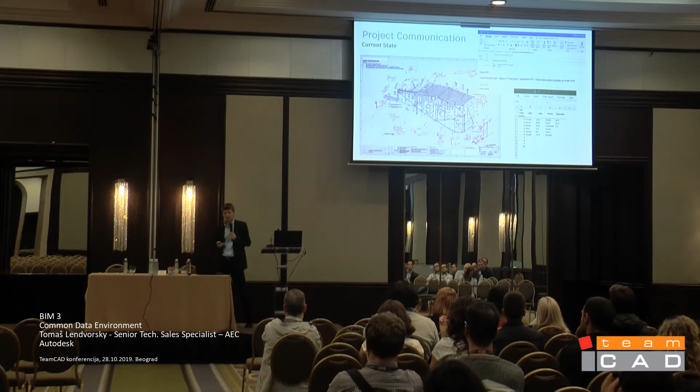And to keep track with such a way of collaboration, some people have an Excel sheet where they are putting information - who shared what, and when it should be finished, and resolved, and so on and so forth. And this is also what is causing trouble later on - not having the entire communication in one location.

And this is what we are proposing: not only having all documents in the cloud, but also having people have access to this cloud solution, and also keeping the entire communication in the cloud.

Which means that what we are offering you is the possibility not only to store the entire document, like for example the DWG file as one document, but what we are enabling you to do is go inside of the document, to see model space, to see paper space - same with the Revit file - that you can go inside and work with the data inside of the document, and you can make notes, markups, and issues on this information, on these documents.

And of course, then having the possibility to have some dashboards or reports, to have a clear idea if things have been resolved or not, who is the owner - I used to say, on which side is the ball. So if you communicate with somebody and send him some notes that he should solve it, you can quickly check if he replied or not. And also to have a management point of view, to be able to see the project as one dashboard, and to see if people are ahead of time or behind time.

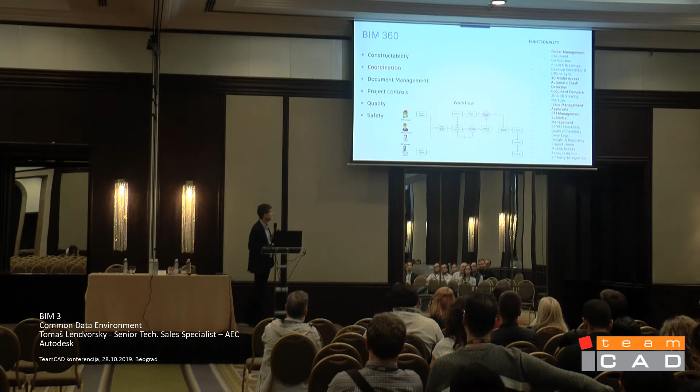And here I want to show you an example of how to make BIM coordination. Please take this really as an example of how we can solve one of the processes. What I've drawn here is a real flow chart.

Here are the different personas involved in the process: MEP, designer, architect - but of course there can be structural engineering and so on. Then there's the BIM manager, again it can be a BIM manager, it can be a responsible person for the design, a BIM coordinator, basically somebody who is coordinating all the data together. So these guys have different tasks and different responsibilities, but they can use one platform to solve their tasks.

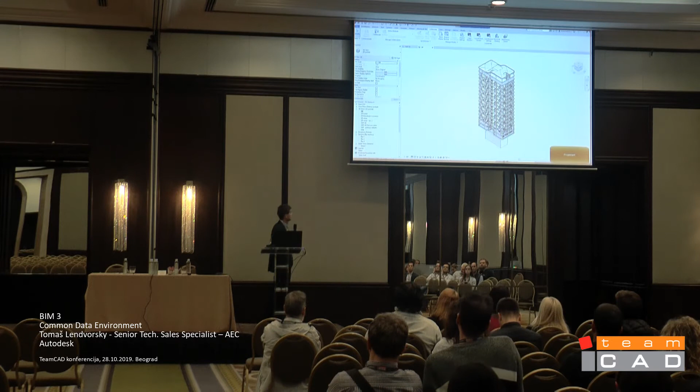So let's start with the first part, and this is uploading data. I'm talking about the design process - basically the design process is done, and these guys, MEP engineer and architect, want to upload the data. So how can it look - again this is an example only - working with Revit. I'm the designer, 'projektant' in Czech language, and I'm using Revit as an architect to make my design. What I can do, of course, is split my design as an entire building or maybe just level by level, whatever I want to do.

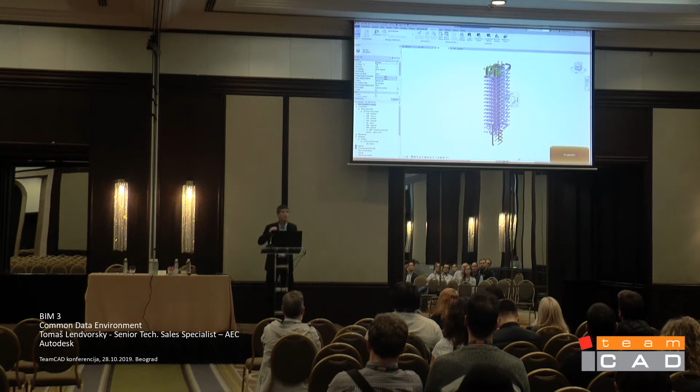And then I can have a lot of views, but I can make a decision about what will be populated on BIM 360. So basically I have control over the data which I am pushing to the cloud. I can have a lot of information on my computer, but the cloud will only have part of it - as I said, only part will be visible for other people.

And the same way with the MEP engineer - he has either the entire model, or as an example, I just separated the third floor. And now, using a very simple method, just drag and drop, I can drop it to BIM 360. The important thing is that I'm working in a web browser, which means that as a person working with BIM 360, I don't have to install anything - I'm just using standard Google Chrome in this case, and I populated the data.

And you can see here that I populated 3 files, but suddenly I have 6 of them, because what I did was prepare the entire model and third floor only, and the system automatically created different documents out of it. So I have a view of these documents which are originally coming from one source, or better said from 3 sources times 2, which altogether means 6.

So, data uploaded, and now it's task for the BIM coordinator to make one aggregated model, basically to put the data together and to work with this. So let's have a look what the BIM coordinator can do.

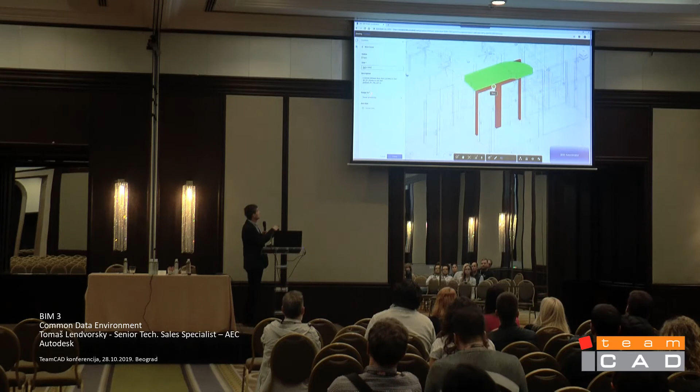Basically, I can create what we call an issue, or we can call it a task, however it's called, and I am creating the task for somebody to resolve it. So I'm starting the communication with somebody. You can see, unfortunately it's relatively small, but the system is proposing to me how it should be named and how the description should be.

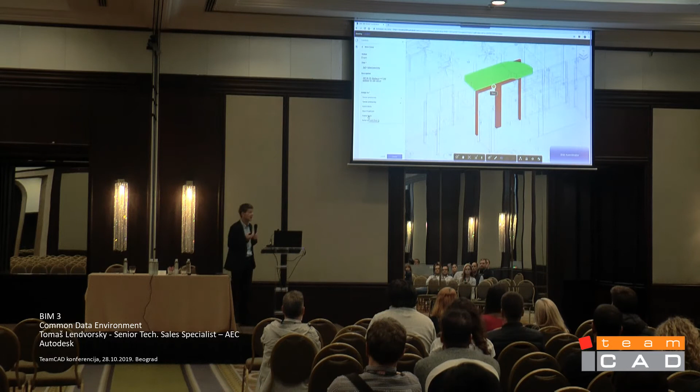But of course I want to put something in the local language, so it's in Czech, but of course it can be in Serbian, whatever you want. The important thing is that I can assign this task to somebody, for example to an MEP engineer. I'm also telling him he should solve this issue by some date, and then the system will automatically create a notification for this guy, he will receive an email and he should solve it.

Now there is another issue raised by the system, but for me, I know that this is not really an issue. I'm going through all the tasks, all the issues, and I'm saying no, this is not the issue, it will be solved on the construction side. So it's also documented that me, as BIM coordinator, I went through each and every item and I covered this and took care of all of them.

And you saw here some metrics where I can see all clashes between all documents which I populated to BIM 360. So of course I see the number of clashes, and let's say this is not very good design because the number of clashes is pretty high, but this is because I didn't make all the openings correctly and so on. But it's up to me to resolve it and to say if it will be done on the construction side or not. So the job of the BIM coordinator has been done.

And what I did, I assigned the issue to the designer. Just by the way, within the system, if I know the name of the guy, I can send the notification directly to him. But what if I don't know the name of the guy responsible, for example, for MEP on the subcontractor side? Then I can assign the issue to the role instead, because I know it should be solved by an MEP designer.

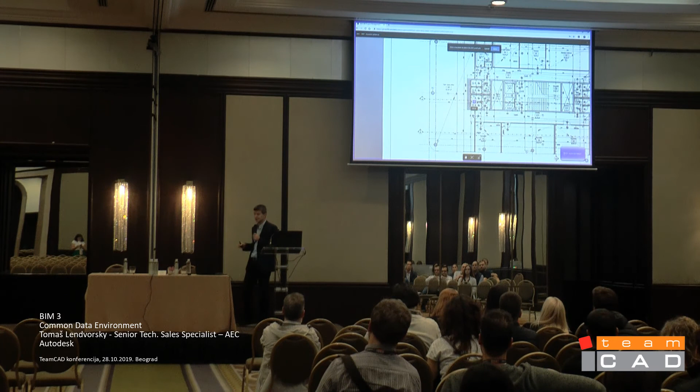I can attach any document or relate my request to any document sitting in BIM 360. I can show in plan or in 3D which wall I want to move—I click and say, this is this model, this wall. And I can add more documents if I want.

Then I type to whom I want to send this request for information—in this case there was only one guy, the BIM manager. This is a predefined workflow where only the BIM manager can receive this request. I also type the date by which I want this issue solved.

I can also add co-reviewers, which is something like, if you imagine email communication, CCing somebody. Basically, you can CC so that somebody is informed about this.

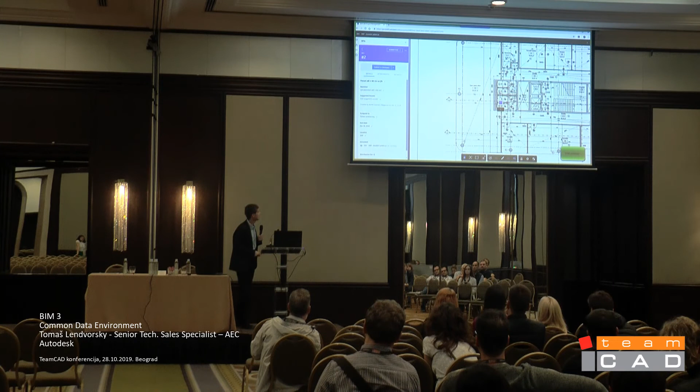And then, as you see, I am BIM manager, so I can see which request for information has been raised. Because I received an email notification, I click on the link, went into BIM 360, and I see the entire request. Now, because I'm aware of it as a BIM manager, I can push it to the architect. So basically all information is going through me, and I am assigning the request for information to the architect.

And then if I'm logged in as an architect, you can see that I'm now the architect, so I can see that I was asked whether a wall can be moved by 50 centimeters. Based on my knowledge I can either say yes or no, or again I can invite somebody else to the communication if I don't have enough information, inside or outside of the company.

All this communication will be stored even when the request for information is closed, or the issue is closed, or any communication is resolved. You can see I'm clicking on some email boxes because the system is automatically generating notifications. If I, as an architect, ask for this, it will automatically notify the manager that I received this. So this is one workflow showing how we can help you.